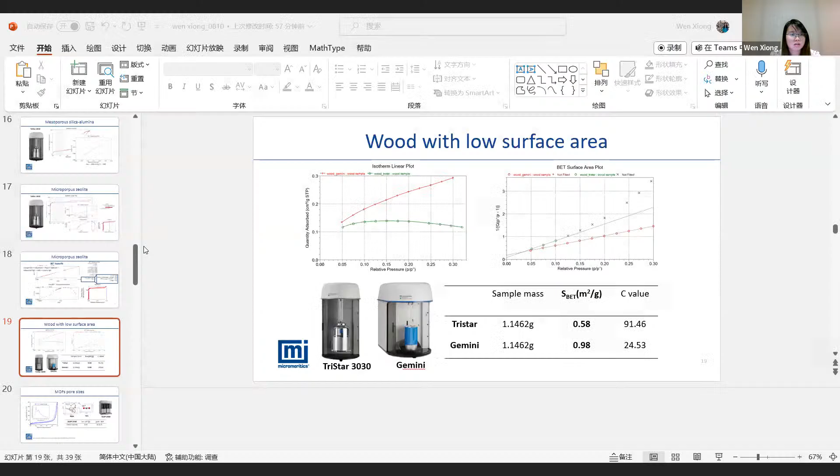Okay, thank you. Good morning, everyone. I'm Wen Xiong from Micromeritics Instrument Company. I work as an application scientist in Micromeritics. Today, my topic is going to talk about gas adsorption characterization in the net zero area.

First, please allow me to briefly introduce Micromeritics. We have 3 different production sites, listed here. The one located in Norcross, in the United States, focuses on adsorption analyzers like the ASAP 2020, which people are very familiar with, and the 3Flex. We also have the ASAP 2460 and the Tristar, and so on.

We also have the AutoChem, which is our chemisorption analyzer. The most popular one is AutoChem 2920, and we have been updating the 2920 to 2930. We also have the AutoPore, which is our mercury porosimetry analyzer. And we have instruments we call AccuPyc or GeoPyc, for density testing, like true density or packing density.

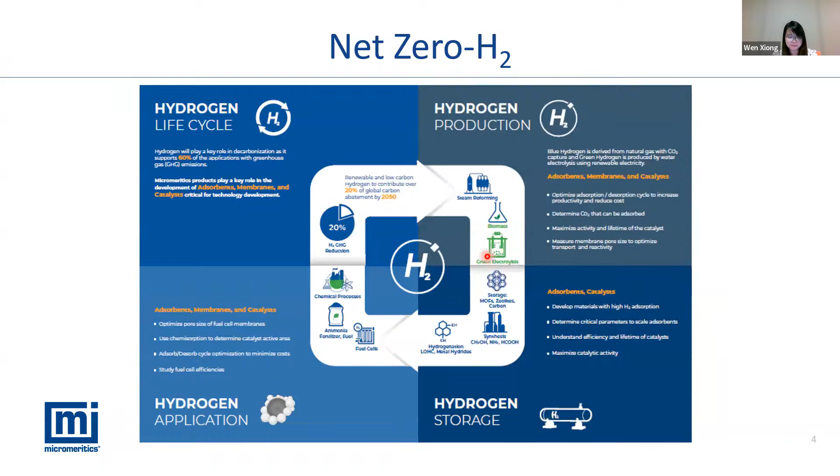So why are we talking about gas adsorption here, because we are focusing on net zero? From the previous two slides, we have seen all the processes like carbon neutral or clean hydrogen energy. All of these processes refer to adsorbents, membranes, and catalysts, three different kinds of materials. Most adsorbents or catalysts, as we know, are porous materials.

So this comes to our topic: characterization of porous materials, like the texture or the activity of those materials, is a very important topic when we consider carbon neutral or hydrogen research in net zero. We have to pay attention to the characterization of those porous materials. Generally, all the research uses gas adsorption to characterize porous materials, to check those materials' surface area, pore size, or pore structure, and we also need to see the porosity of those materials.

If we are talking about the catalyst, we really want to see the reaction activity of the catalyst. That's the things our micromeritics do best.

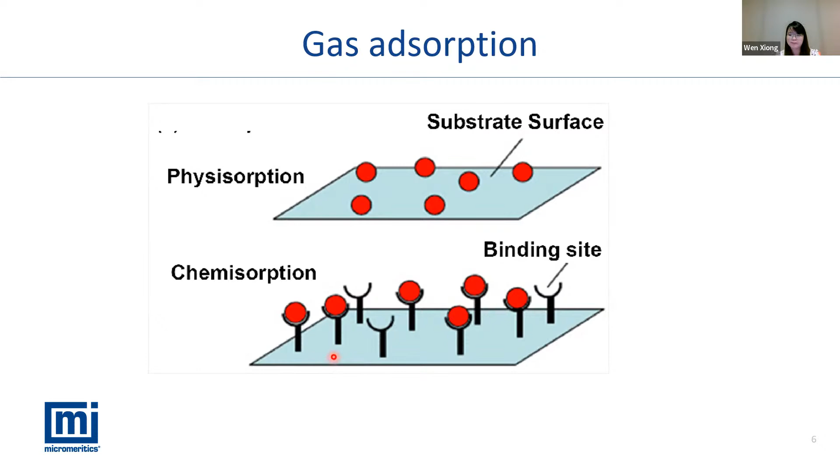Here we are comparing physisorption and chemisorption. I guess people are very familiar with it, so I'm going to introduce it briefly. When we're talking about physisorption, as I just mentioned, it's bound by van der Waals force, which is very weak bonding. So the adsorption energy is low, normally around 20 to 40 kilojoules per mole.

In physisorption, we have non-selective adsorption, meaning it's not location-specific, because adsorption can occur on the surface uniformly. We assume it's uniform everywhere on the surface. That's why I say there's no selectivity - physisorption can occur on the surface everywhere.

Since there's a weak interaction between the gas molecule and the surface, physisorption always happens at low temperature. On the other side, chemisorption always happens at high temperature. When we say low temperature, we're normally talking about liquid nitrogen temperature, which is 77 K. At high temperature, we're normally talking about room temperature, or even 50 to 100 degrees C. In some cases, we may need to go a little higher, like 150 to 200 degrees C. So that's one of the differences between physisorption and chemisorption.

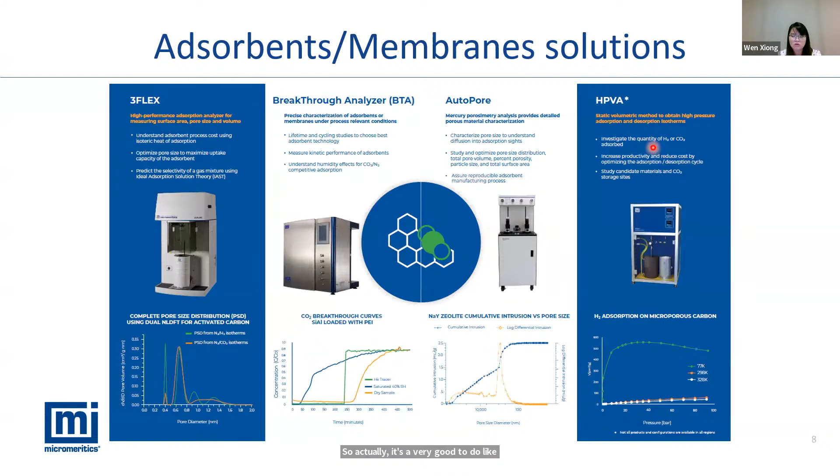The HPVA is testing the sample under high pressure, which can go up to 100 bar or even 200 bar. Since we are talking about hydrogen storage and CO2 storage very often right now, HPVA is a very good tool to do hydrogen storage and CO2 storage testing at very high temperature and very high pressure.

For all the physical adsorption measurement in Micromeritics, we are using the static volumetric method, as I just mentioned in the HPVA and the 3Flex working principle. The static method is measuring the adsorption pressure change during the adsorption process. Then we use the mass balance equation and the gas equation of state. With the measured pressure, we do the calculation and get the gas adsorption amount, the pore size or pore structure parameters, and using different models we also get the pore volume, pore size, and surface area numbers.

The left figure shows a schematic of the volumetric adsorption setup, which is a very easy setup. Normally it consists of three different valves: one to the adsorptive, another to the vacuum, and the third one to the sample tube.

Depending on different instrument models, we have different ranges of pressure transducers to measure different adsorption limitations. With the pressure transducer, we are able to measure the pressure change during adsorption - that's the core center of all the testing.

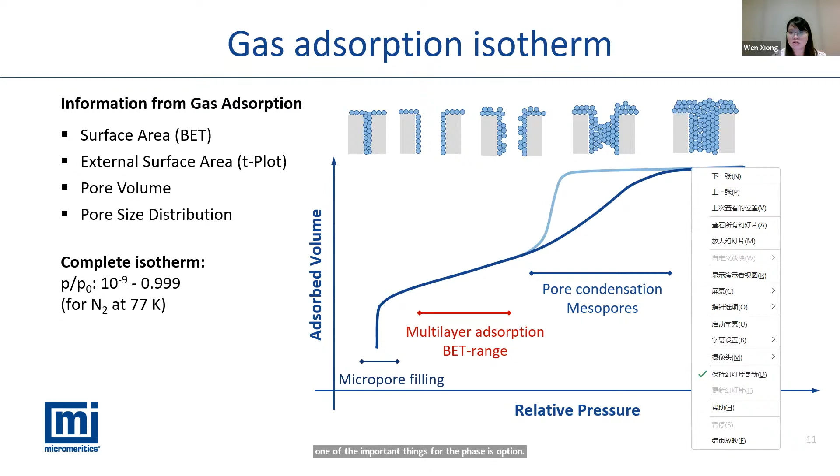Firstly, let's talk about one of the important things for physical adsorption - BET surface area.

This is one of the models we use to calculate the surface area of materials after we get the gas adsorption isotherm.

But later on, the BET researchers - three of them - found that Langmuir's assumption of one monolayer was not suitable for most cases. So they developed their own idea, giving a new assumption.

They talked about five different kinds of adsorption. The biggest difference from the Langmuir model is multi-layer adsorption versus monolayer adsorption. They also assumed the interaction between adsorption molecules can be neglected, and what they consider important is the interaction between the adsorption molecule and the surface.

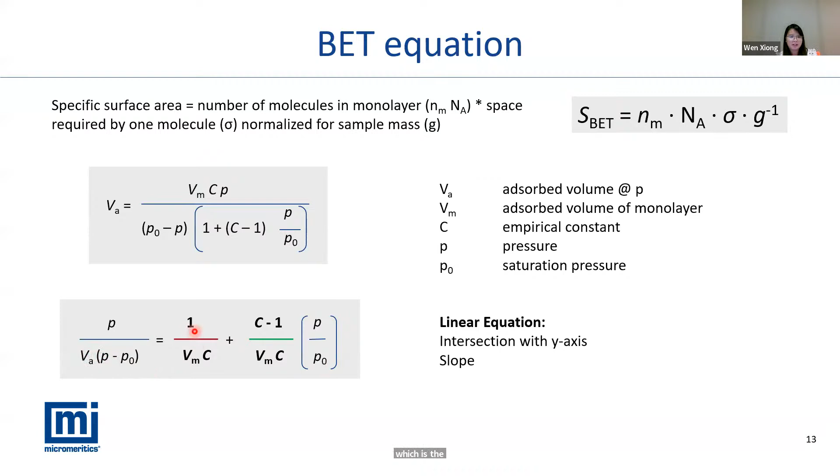The monolayer capacity and the C constant can be calculated from this equation, which comes from the y-axis intercept and the slope of the fitting data in this linear transformation form. This graph is the corresponding data we call the BET transform plot.

It is important to note that the linearity does not apply to the whole range. For example, when the relative pressure is lower than 0.05, it doesn't fit the linear form. For non-porous, mesoporous, or macroporous materials, this range is typically between relative pressure 0.05 to 0.3, which is a very typical BET range.

The C constant accounts for the adsorption enthalpy of the first layer and the enthalpy of condensation. By this definition, we have to get a C constant larger than 0 in our BET plot. That means if the C constant is smaller than 0, your BET plot doesn't make sense. It's invalid data. The stronger the interaction between the gas molecule and the adsorption surface, the higher the C value we get.

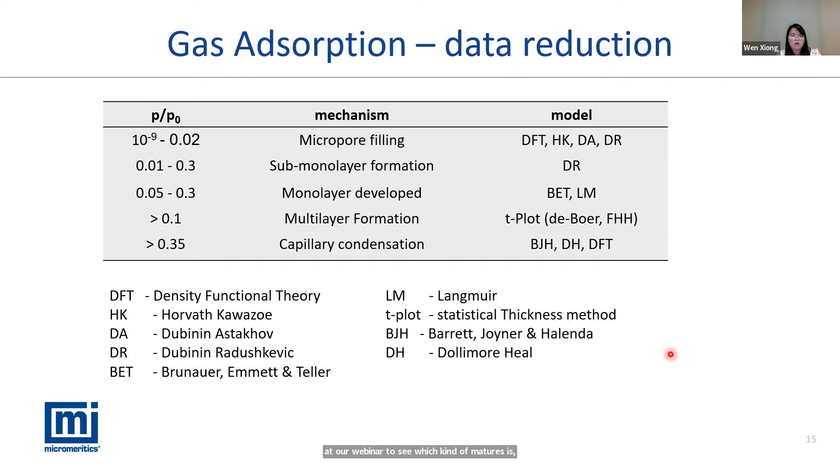Our Micromeritics software has as many as 52 models available for applying. You are very welcome to visit our website or look at our webinar to see which kinds of materials are suitable for which kinds of models to get the reasonable data you want.

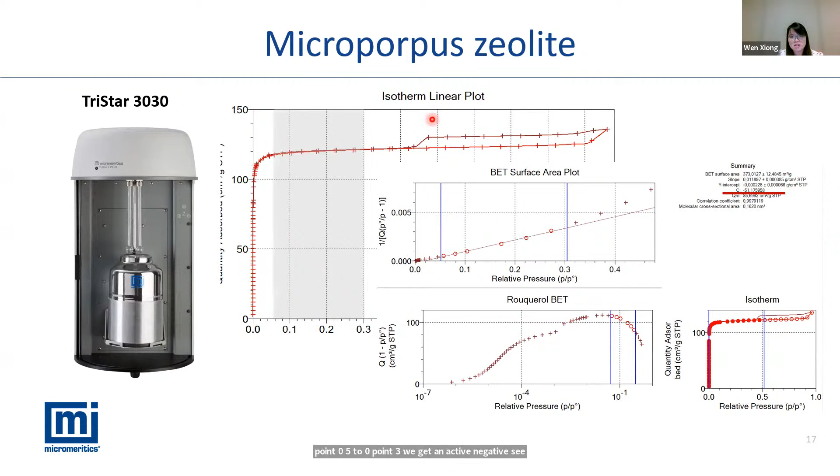We tried to extend the range to a lower relative pressure, and our software can offer outlier BET fitting. This is for Micromeritics software, the BET outfitting script. This script automatically does the BET calculation and checks all 4 criteria for using the BET equation. In this case, when we use the traditional relative pressure from 0.05 to 0.3, we get a negative C constant, so this data reduction is incorrect.

Then we jump to using the BET outfitting script. This is the process of how to use the script to do the data reduction. And we're able to see here we get a C constant value larger than 0, which makes sense for us. We also checked the other 3 different criteria for using the BET equation here. So using our BET outfitting script, we're able to apply the BET equation for microporous materials.

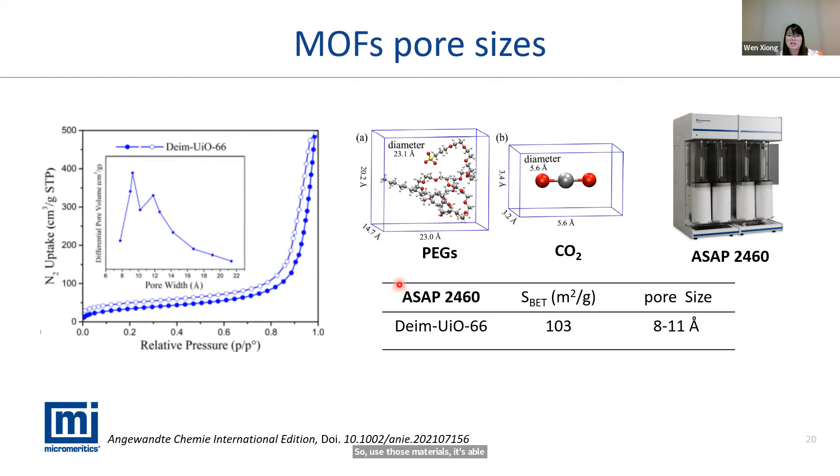CO2 can very easily go into the pore channel even at high temperature, compared to liquid nitrogen temperature. So here I'm happy to show an example of using our 3Flex to check micropores, especially very narrow small pore structures, for the adsorption mechanism.

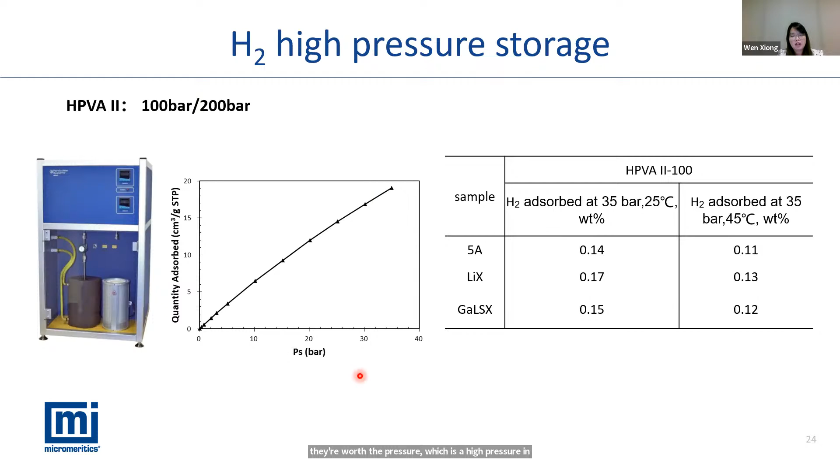That's the results showing on the right. The middle figure is the isotherm of the adsorption, quantity adsorbed versus pressure, which is high pressure in this case. So now I'm done talking about the adsorbent and membrane solution.

In the second part, I want to talk about some details about the catalyst solution. As I mentioned before, we normally use physical gas adsorption to check the texture property of the catalyst support. This is the first stage characterization of the catalyst.

The second stage of the catalyst characterization tries to characterize the catalyst itself, like the supporting metal catalyst, some metal oxide surfaces, some zeolites, some MOFs - those kinds of catalysts - using catalyst chemisorption characterization to do the catalyst activity or selectivity evaluation.

I also list 4 different kinds of instruments here. We are going to talk about the ICCS and FR later on in detail, so we'll skip this one. AutoChem, I'm going to talk about this in detail since this is our newly updated AutoChem. The 3Flex chemisorption - if we recall, I was talking about 3Flex also in our adsorbent or membrane solution. When we're talking about physisorption, our 3Flex can be a very good instrument for micropores all the way to macropores.

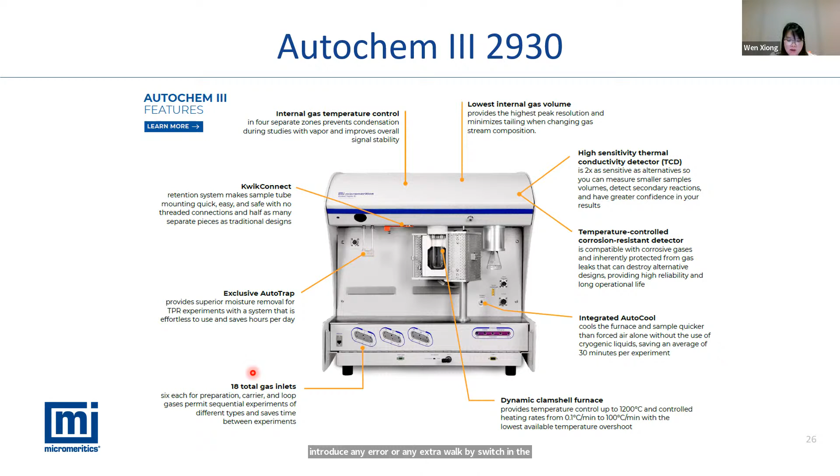Now let's go see the KwikConnect which I mentioned. I really like this design. This is our patented new KwikConnect sample loading. The new design puts these 2 separate pieces together, and instead of using a nut for sealing, we use snapping for the sealing. With this design, we are able to make sample tube installation very fast, maybe 1-2 seconds, very easy and more reliable than our traditional design, because we are using one piece instead of 2 separate pieces. We can also reduce the risk of breaking the sample tube.

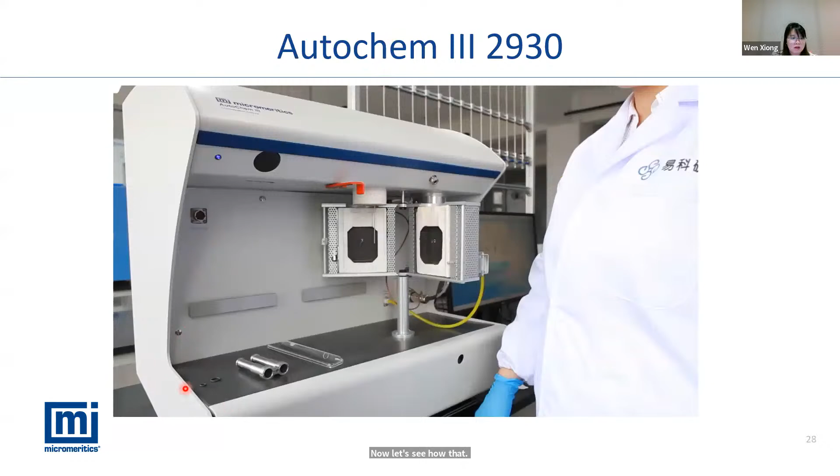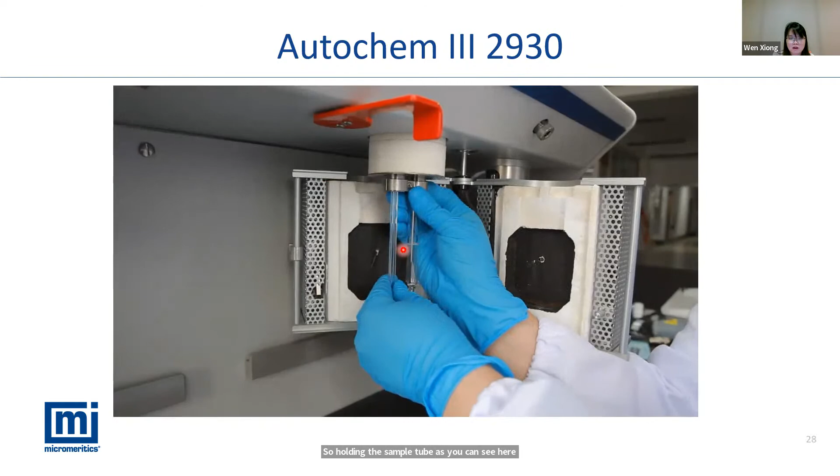As you can see from the picture, and you'll see in the later video, we just need 1 hand to hold the sample tube. In the previous design, we had to use 2 hands to hold the sample tube, which has a high risk of breaking the tube. Now let's see how the snap lock works. As you can see, we just need one hand to hold the sample tube, and then with a click, we snap the sample in. The whole loading process is easy and faster.

Here is our new vapor source generation mantle. It's much easier to operate, as you can see from the video.

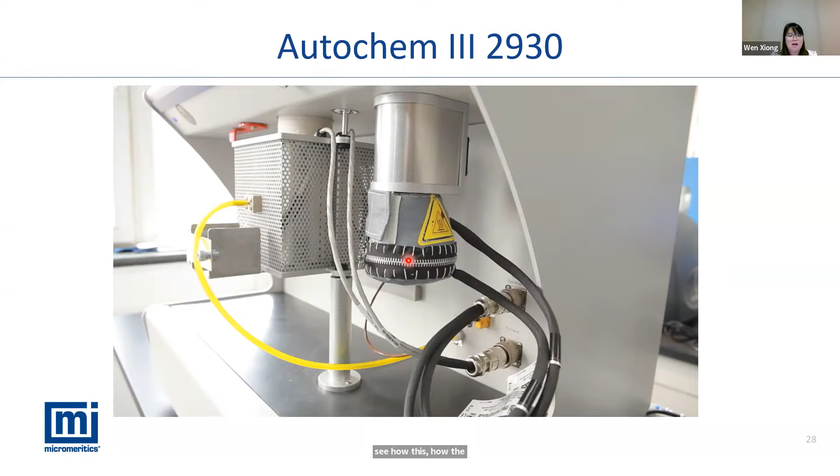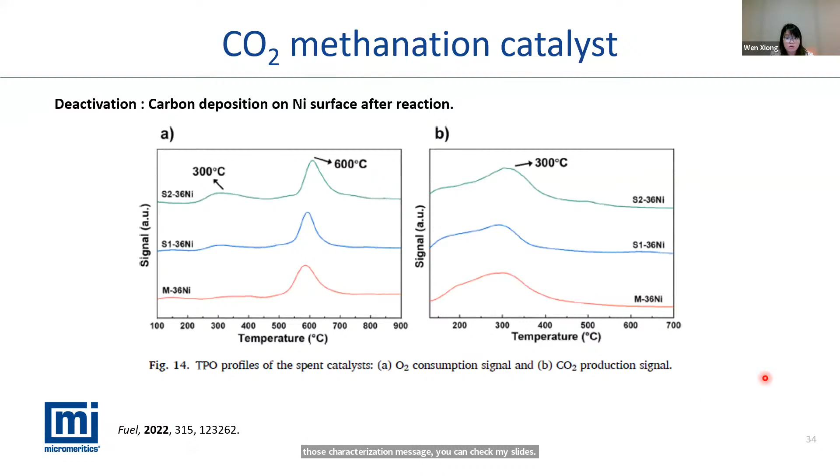Finally, I would like to introduce in-situ gas adsorption characterization for catalysts. This is a new promising method from Micromeritics, in-situ gas adsorption. Here I'm using the methane dry reforming reaction on the nickel catalyst as an example.

As we always know, methane dry reforming is always operated at very high temperature, like 500 to 650 degrees C. At this high temperature, we cause nickel deactivation either by carbon deposition or sintering. If we want to check the deactivation of the nickel catalyst, we are able to see all the results and the reasons in one experiment by using the in-situ gas adsorption system. This system helps us more easily and quickly check the deactivation mechanism.

So how does the in-situ gas adsorption work? Let's look at the two instruments. We combine our Micromeritics ICCS, which is one instrument, with the FR system, which is the other. If we combine these two systems together, we are able to do the in-situ gas adsorption, in-situ studying the change of the nickel catalyst during the methane dry reforming process.

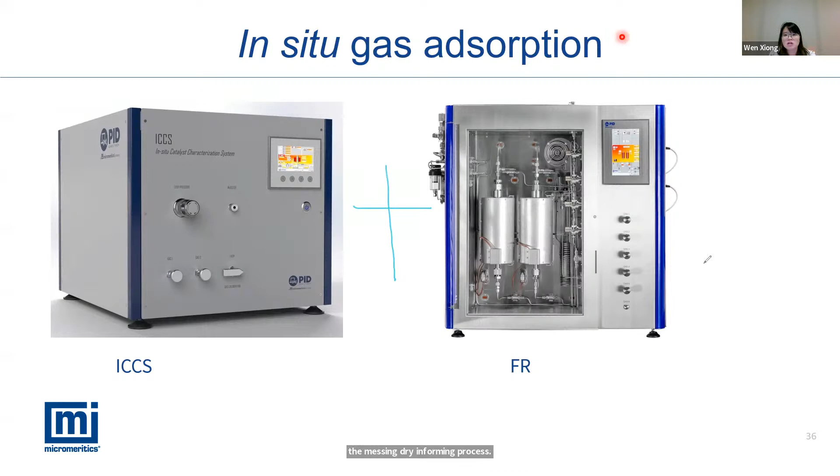First, we load the nickel catalyst into the FR sample tube, as shown here. Then we flow either CO or hydrogen, whichever gas you need, from the ICCS system all the way to the sample tube to conduct pulse chemisorption on the nickel catalyst, calculating the dispersion before the reaction.

Third, we flow CO2 and methane to the catalyst, recording the production from the sample tube as a function of time, or as a function of temperature, or as a function of pressure—whatever you want to check regarding the dry reforming performance of the nickel catalyst.

We can go to the separator to separate the products, like water or methane from the reaction, or other products, whatever you want. Then we do the online recording by either MS or GC to record the reaction product.

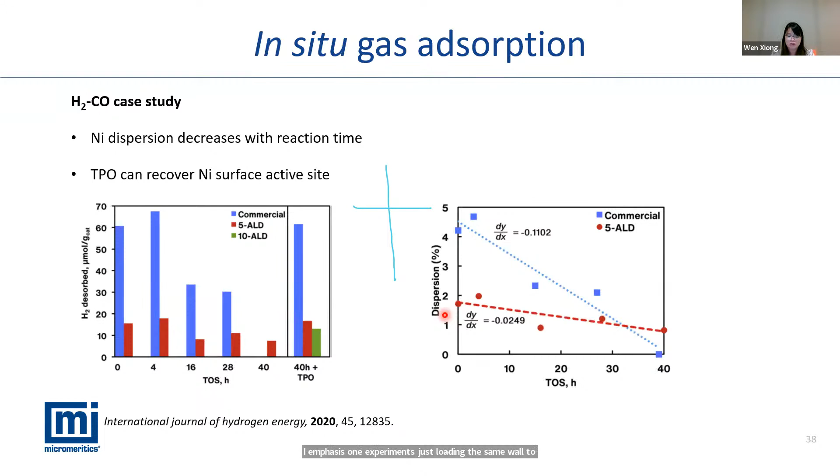This is all I have today. Thank you for your attention and thank you for your time. I guess my question slot will be later, right?

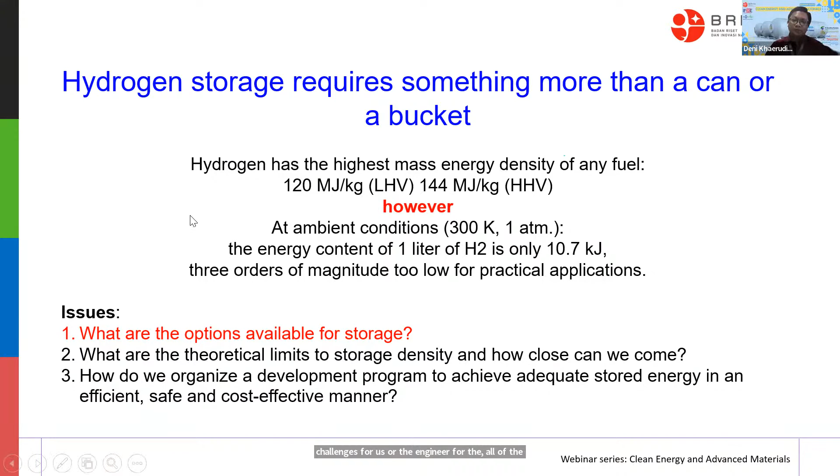This is just to remind you again of the comparison of hydrogen storage methods. So we are focusing on how hydrogen is stored, what kind of method, like compressed gas - this is the physical one - or the liquid state, which is in the cryogenic condition at minus 253 degrees Celsius. This physical option, we will talk about more.

This is about absorption, physical absorption by porous material. There are many porous materials, but here I will focus more on carbon. Dr. Xiong also mentioned that physical absorption can be reversible, a little different from the chemical one. And then there's metal hydride, which I will highlight a bit.

There are some advantages and disadvantages to all these methods - the complex hydride and chemical hydride also. There are actually many options, and in the next slide I will show you more of the main options for hydrogen storage.

So what are the important characteristics for the hydrogen storage media or sorbent material? If I concluded, there are 7 points, like high hydrogen content per unit mass and unit volume. This is what we need to concern ourselves with.

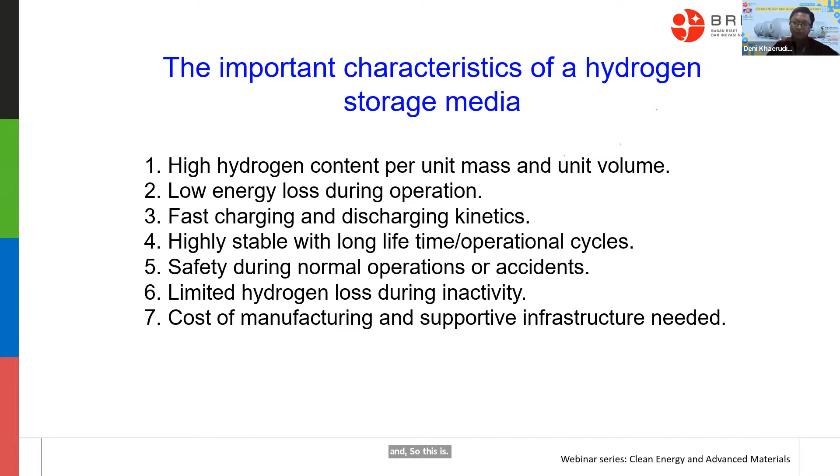And the cost of manufacturing and supportive infrastructure, indeed yes. So these are the 7 characteristics that we need to consider when we want to develop the storage media for hydrogen.

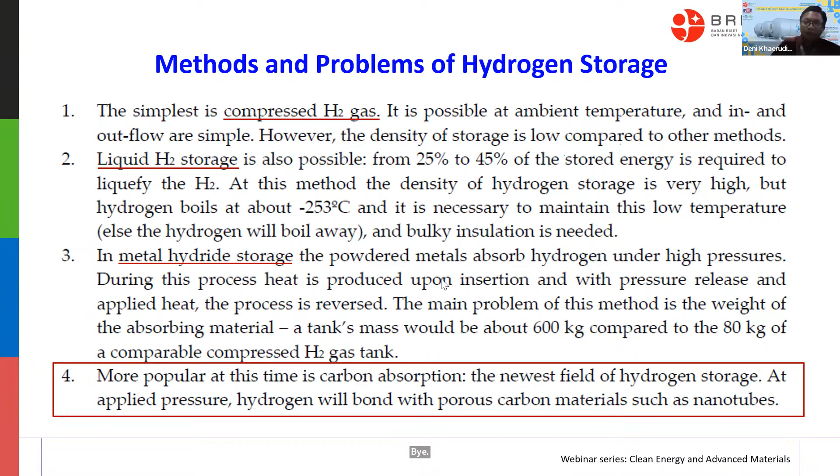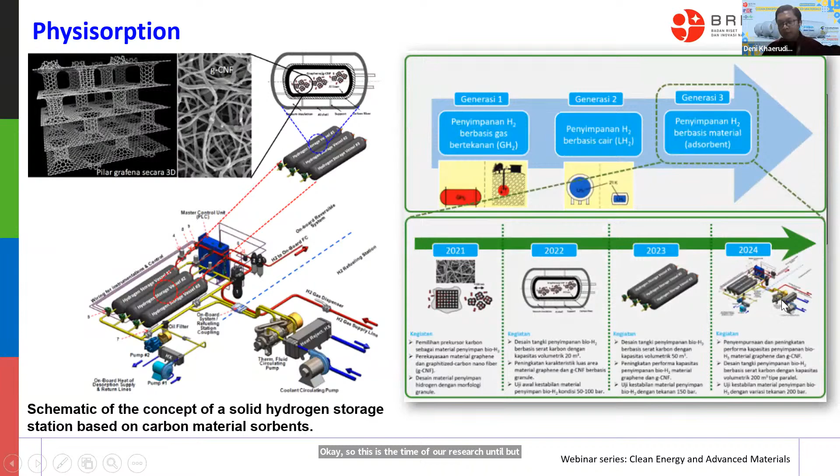Okay, so this is the timeline of our research, but maybe not into the system yet for currently, just maybe until the storage I think. Okay, we just want to highlight again what kind of hydrogen storage is possible, the most possible ones.

On the top part, in the upper part, this is the physical base. This is already well established, like compressed gas, cold compressed, and liquid hydrogen that I already mentioned before. On the bottom part, the material base, which is our concern, still has many possibilities for research to advance and make it more efficient in order to make it as viable as the physical base one.

For the material base, there are two types: chemical sorption and physical sorption. We are focusing here on physical sorption, which is focusing on carbon materials. Actually, for physical sorption itself, there are many besides carbon, like zeolite. Here in Indonesia we have zeolite mineral, many. Carbon for sure, we can also use directly graphite mineral or even from biomass. Metal organic framework, there are so many advancing in recent journals, using these more both for supercapacitor, for battery, or many other applications, and many other techniques also that we can use for storing hydrogen.

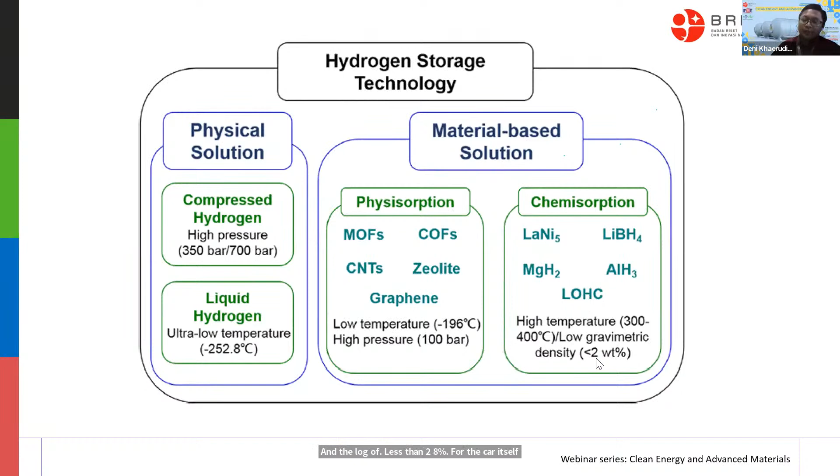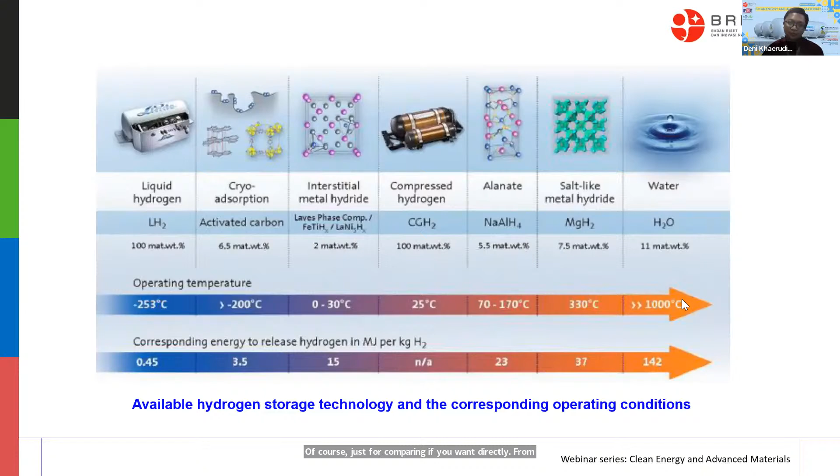Yeah, this is the conditioning of each storage technology, like in the liquid - the operating temperature is minus 253 again, and this is comparing the corresponding energy to release hydrogen in megajoules per kilogram hydrogen. You can see here the compressed one, and also the alanate metal hydride. And the water itself, of course, just for comparing - if you want directly from water, you need about more than 1000 degrees C. Okay, so for sure this is not feasible for industry.

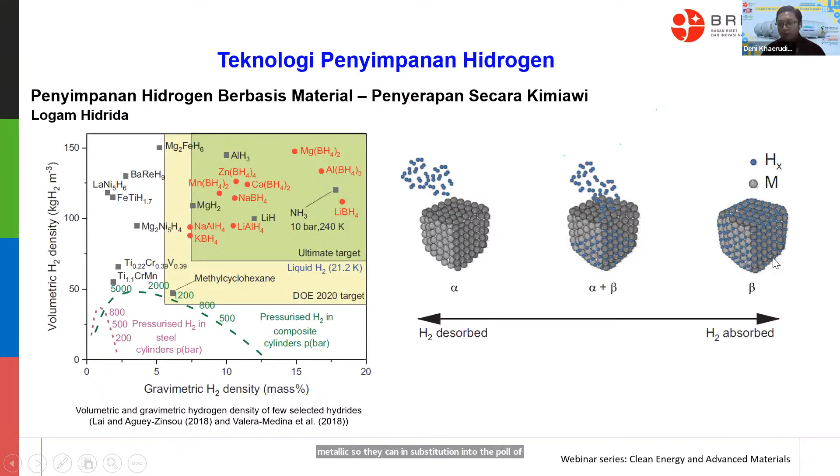So H is meaning the hydrogen, and M is the metallic. They can interstition into the pore of the metallic ether. So this is the condition of the absorb, but this one is the desorbed.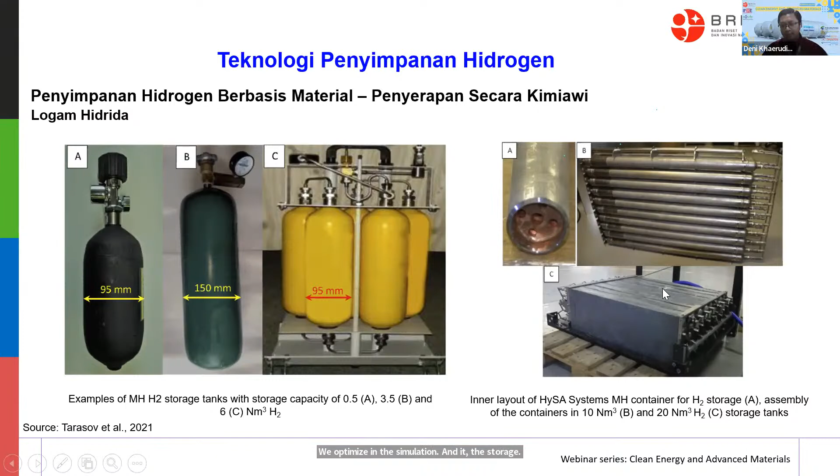So this is the conditioning when we want to do the experimental condition after we optimize in the simulation. And if it's the storage tank itself, there are many ways, the container itself. So this is the conditioning of the metal hydride in the experimental condition in the facilities lab here in SAIAMC.

So how much laboratory preparation that we need for the metallic. Actually this is also similar to the solid storage one. The conditioning here uses 30 to 80 bar, high pressure up to 200 bar, and then the lower pressure is less than 20 bar, and there are many other facilities that we need to consider.

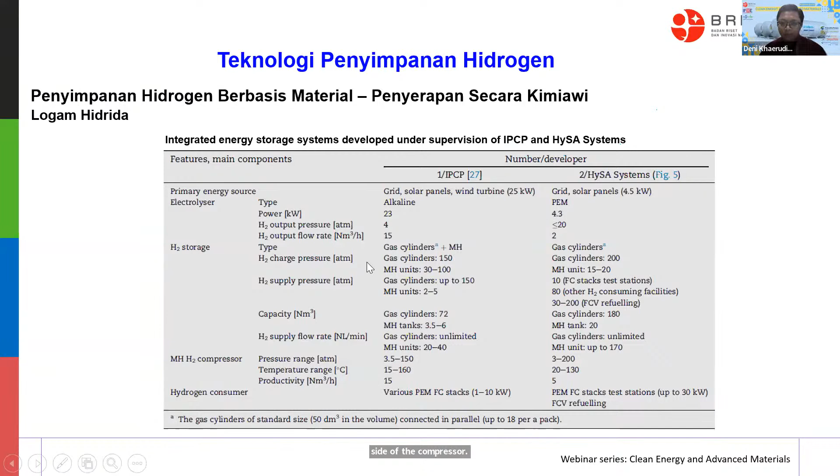Okay, so this is the integrated system like this one. The information is from here, the report, like what kind of compressor, the consumer, and many others like the gas cylinder etc. Maybe I will not go into details here.

Okay, so this is the concept of the physisorption itself, like this is the adsorbent. For instance, we have graphene or graphene oxide, or even CNT or active carbon, activated carbon, and also the absorptive element itself is like hydrogen, or maybe if we want to talk about CO2, it also can depend on what we are focusing on.

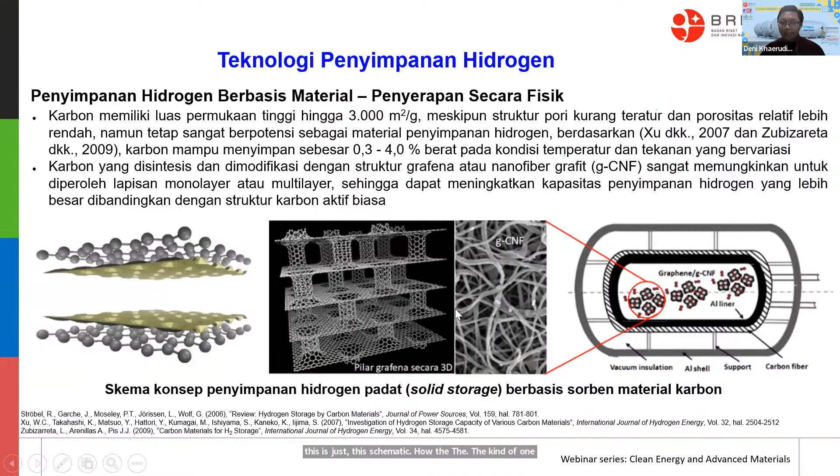Okay, so this condition is possible for reversible absorption desorption because this is only a very weak force only on the surface, not like bonding like in the chemical state. So this is just the schematic of how graphene or the carbonaceous base like carbon nanofiber acts as the storing media of hydrogen when put in the tank. And yeah, there are many options for the carbon base, like using activated material.

Even there are also some options like activated charcoal here, but I'm not sure, I haven't yet elaborated further in detail about this research on the charcoal. The one that I already studied is about using CA, activated carbon, CNT or nanotube. There are also many others. Meanwhile, for the hydride, there are many alloys, intermetallics, non-crystalline complexes, and many others also.

Okay, so if you are curious about the morphology of the carbon itself, on the top part is the CNT, carbon nanotube. The lower part is the graphene, from the graphene.

So this is the condition of storing hydrogen in the solid state condition. Like the hydrogen molecules are attracted to the carbon material on the material surface through van der Waals interaction. This is a very weak force leading to adsorption. And then the desorption, on the other hand, likely occurs when conditions such as temperature or pressure are changed, meaning we increase the temperature or pressure, and then it will release, causing the hydrogen molecule to detach from the carbon material surface. So this is the basic condition, adsorption, desorption on the carbon surface.

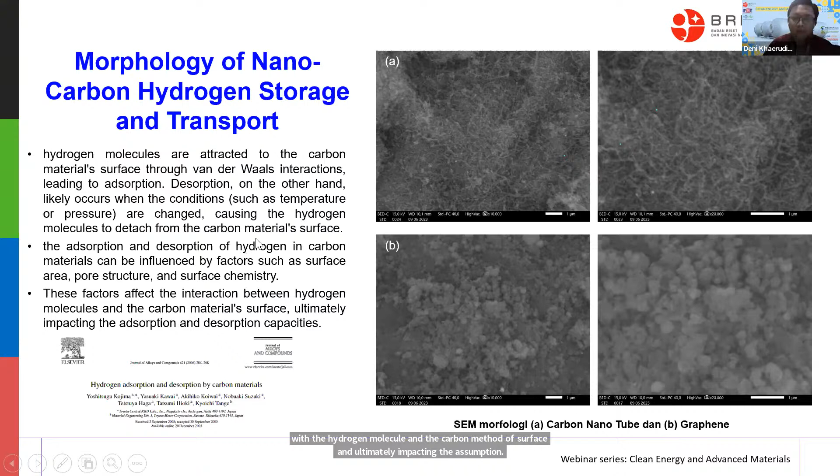Can be influenced by factors such as surface area, pore structure, and surface chemistry itself. Meaning, we can also load it with some catalysts like nickel, platinum, or others, but only in small percentage. This factor affects the interaction between hydrogen molecules and the carbon material surface, ultimately impacting the adsorption-desorption capacity. So this is the basic condition when you are interested in doing hydrogen storage based on carbon material.

Therefore, we need another testing, the one that Dr. Xiong already showed. But unfortunately, in our institute, we still don't have those facilities. Maybe later I will ask you, Dr. Xiong.

So this is our hypothesis. We have two hypotheses here. Hypothesis one: nanopores enhance the hydrogen absorption capacity. Hypothesis two: acid treatment to increase the active surface is expected to increase the absorption capacity of MWCNTs, and open cap and surface functionalization of MWCNTs is to increase absorption capacity.

I think this is just the carbon one, right? So we need to enhance the surface area or the pore size, the pore distribution, I mean the pore distribution with a certain pore size diameter.

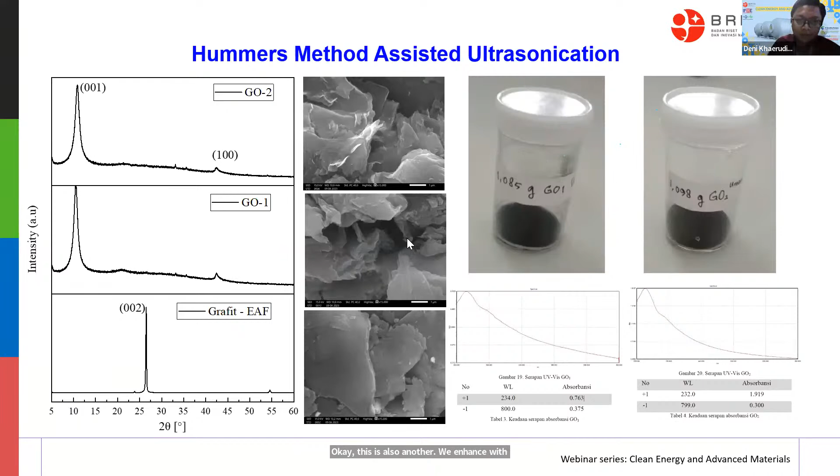This is also another result of ours regarding enhancement with ultrasonication. Maybe I'll just skip it. This one I took from another research actually.

So some pores with high surface area, about more than 2,000, even more than 1,500 is already very high surface area. They successfully achieved almost 3,000 meter square per gram. This is very high. Therefore, the hydrogen capacity of their research is very successful.

We can see from this table, this is the pore size that they achieved from all of the sample types they have. This is the surface area, BET based, that they obtained. Almost all of this material is higher than 2,400.

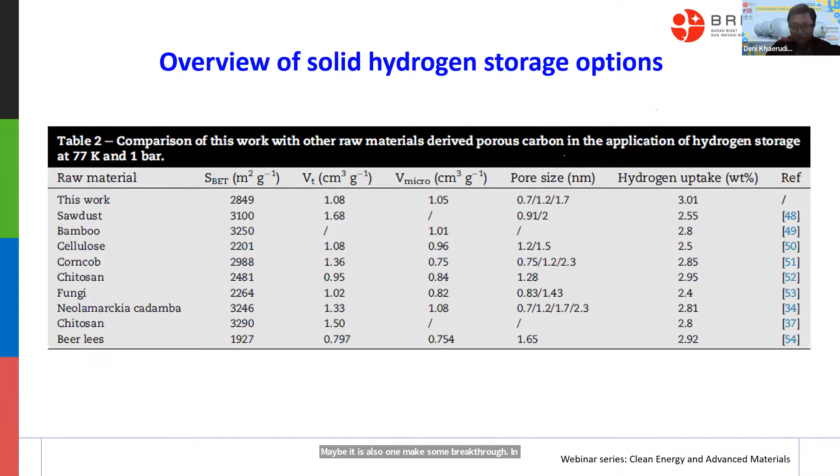This highlights the targeting of the DOE goal for hydrogen storage, the gravimetric capacity, material-based, the achievement target for 2025 is about 1.8 kilowatt hour per kg for the material base. This is the ultimate target, and the volumetric capacity - for the volumetric capacity, if possible, about 1.7, but this unit is in kilowatt hour per liter, whereas before it was mole per gram or other different units. All of this is the ultimate target from the Department of Energy for the storage goal of hydrogen based on the solid state.

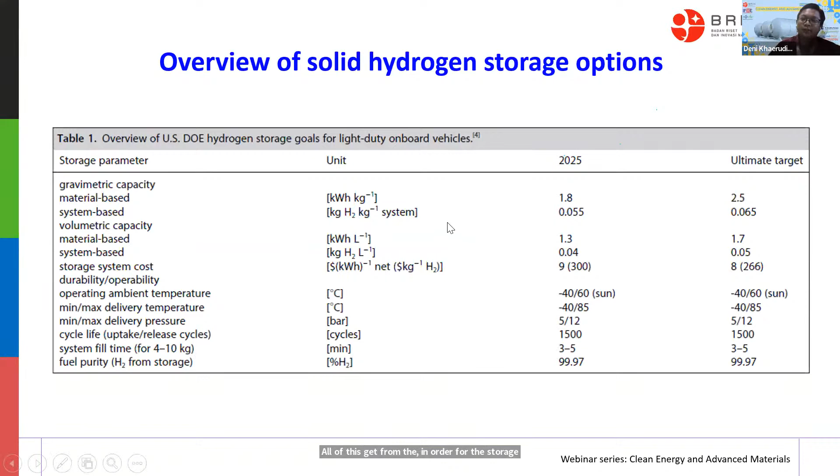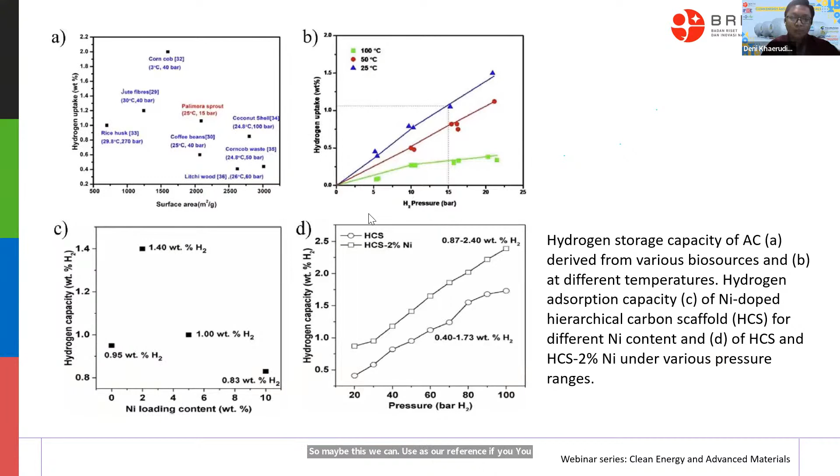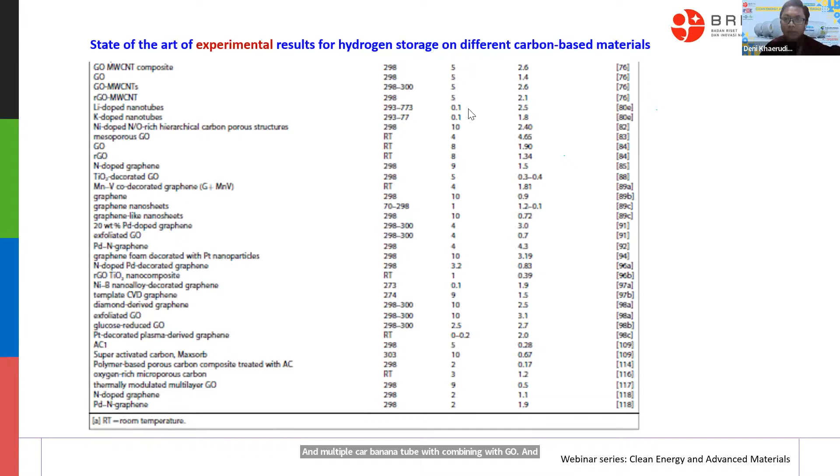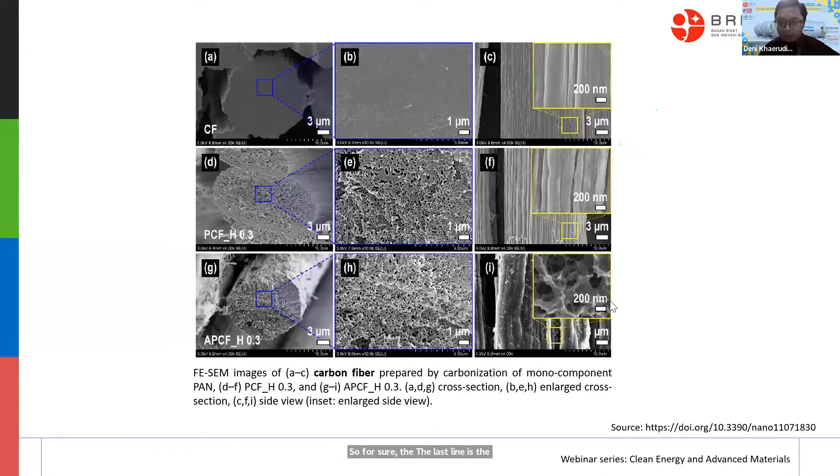Okay, I just highlighted again. So this is the carbon fiber. If you want to know the morphology, the ABC has no treatment, the DEF has some treatment, and GHI has a further treatment. The pore size and pore distribution are different between the second and third lines, and also between the original virgin one and the last line. For sure, the last line is the ideal one as the sorbent material for hydrogen, and indeed this is not easy to achieve.

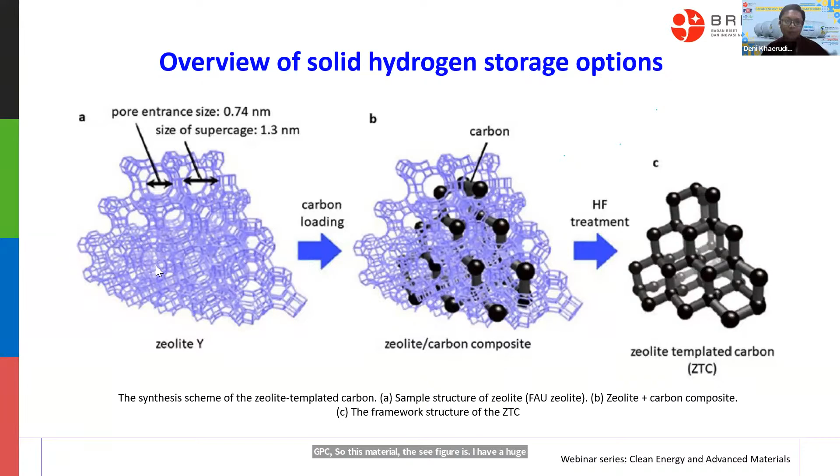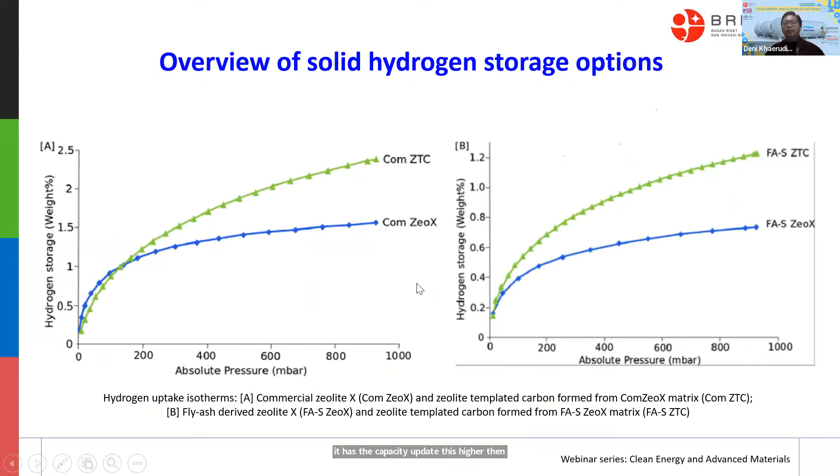This is maybe the expertise of Dr. Xiong, I think. Maybe there are some apparatus you've mentioned similar to the function of the Sieverts apparatus. Honestly, we don't yet have this apparatus. We plan to study hydrogen storage using this one. Maybe at first we want to develop a prototype, but if you have something like microbalance equipment, I'm very interested.

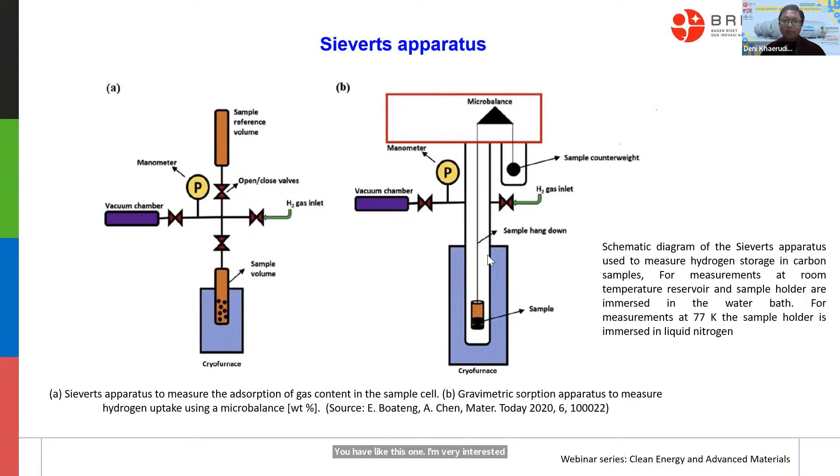Maybe Dr. Xiong can explain further. So actually the basic concept of conditioning is the transport thermodynamics that can operate at low pressure or low temperature conditioning. The blue one is nitrogen, liquid nitrogen I think, for the low temperature conditioning. Many research studies show temperatures like 77 Kelvin, 78 Kelvin, similar. And also this one for the dissolved condition. So this is just the concept of adsorption desorption based on the Sieverts analysis.

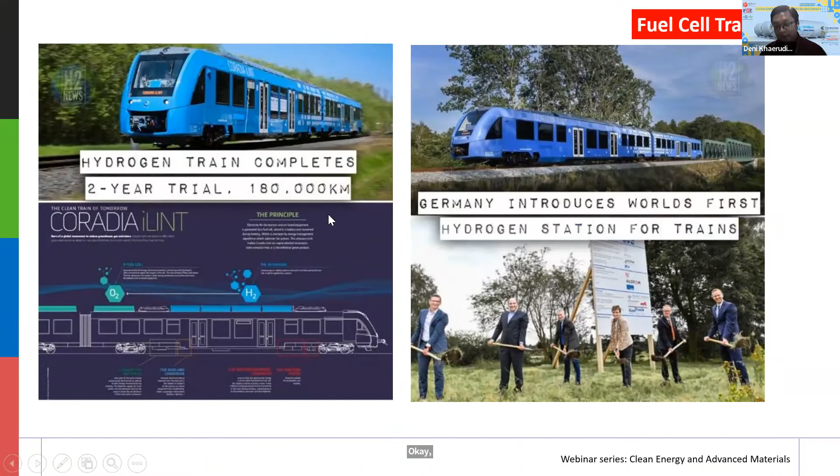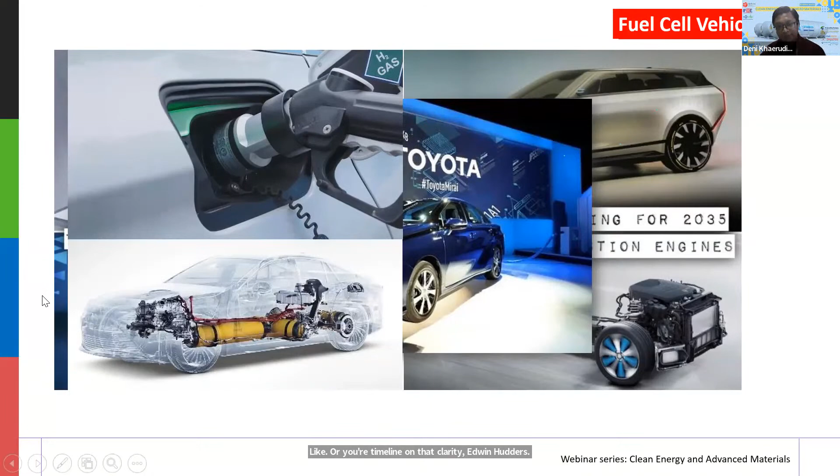I just want to highlight again, this is some application of hydrogen already in our real life - for train, for aviation it will be by 2035. For cars already, like hydrogen BMW, Jaguar, and many others like Toyota Mirai, Honda Clarity, and many others. This is just to show how fast hydrogen is developing, but this is the gas pressure based condition, for mobile applications like this. This is from Linde, and like Tucson, Mirai, Clarity, Nexo. There are many brands developing FCV, fuel cell vehicles.

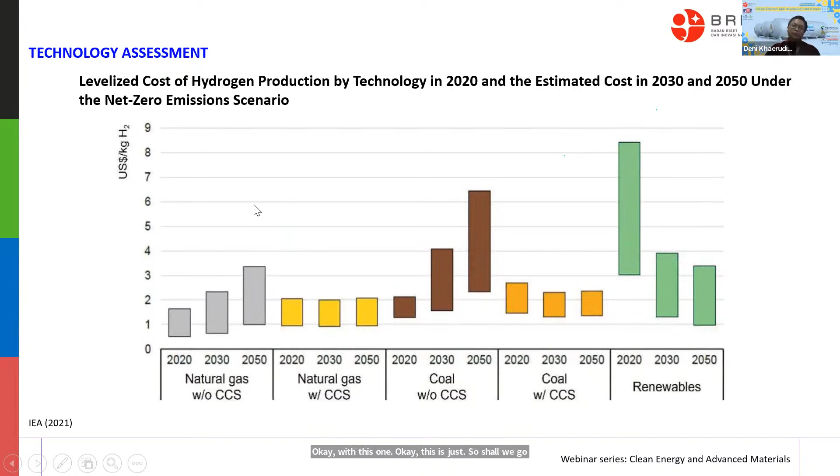This is the LCOH, the levelized cost of hydrogen, like this from natural gas. At 2050 it will increase more in price due to decreasing green or renewable hydrogen, and natural gas. This is without CCS. If this is with CCS, carbon capture storage, coal will increase more in price by 2050 as expected, and then coal with CCS may still be able to compete with this one. This is just to show the future prospect of hydrogen in real industry applications.

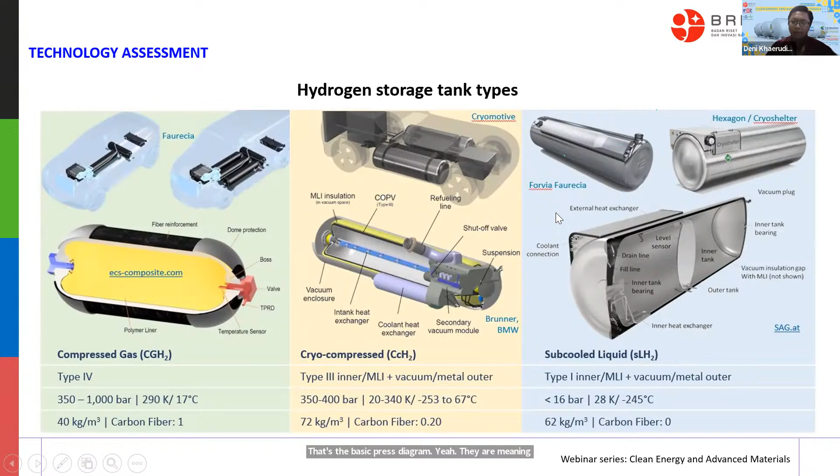This is for the pressurized or storing of hydrogen, both in cryogenic, liquid, and compressed gas form - just the basic phase diagram. There are many options like compressed gas, cryo, and subcooled liquid called cryo. This is just the storage tank, not the sorbent media. The storage tank for compressed, cryo, and liquid - the physical condition that is required.

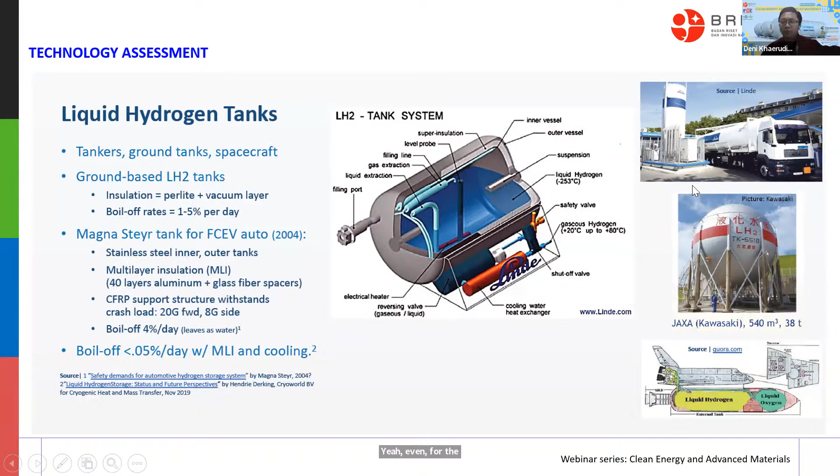And this is for the liquid hydrogen tank. Even for aerospace, like JAXA, they're using this for aerospace, liquid based hydrogen. For aviation, as I mentioned before, this is also actually using the liquid base. Called cryo compress - this is especially for BMW, they're using the cryo compress condition.

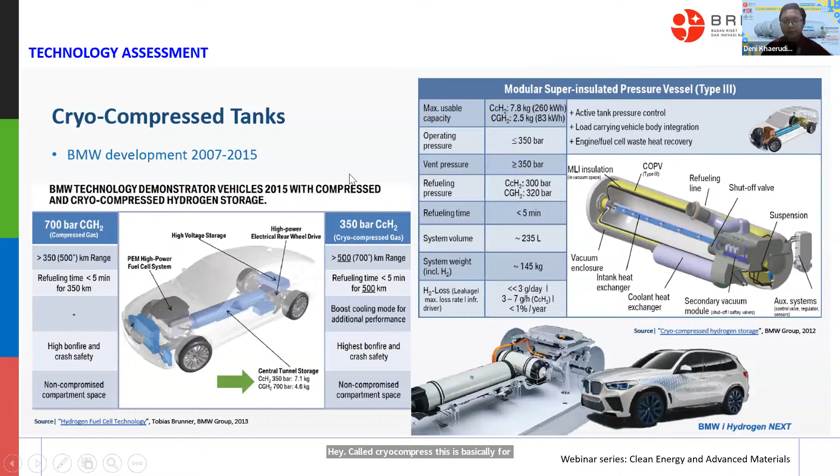This is some of the marks from the industries available for this type of tank. I'll just skip this one. This is the latest storage tank made of carbon fiber, the type 4 tank.

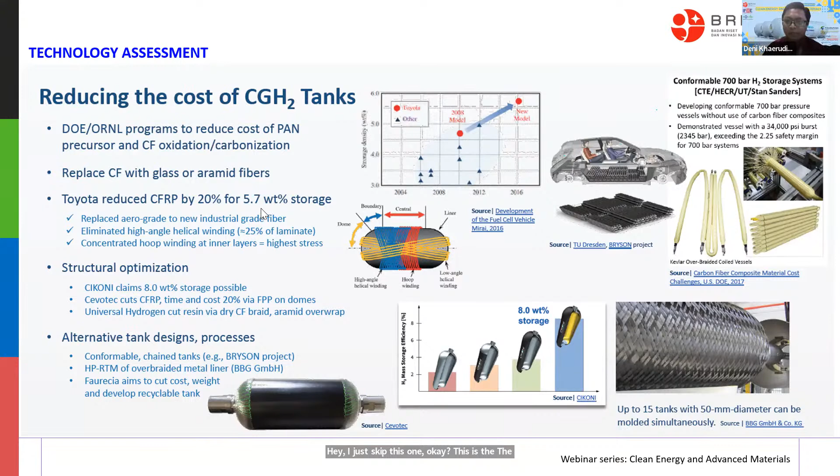So this is the anatomy of the tank itself for hydrogen storage specific purposes. This one is also from Dresden. Just highlighting it, and this is my remark.

There are many ways of storing hydrogen, for instance compression, which can be used to store small quantities of gas. Storing hydrogen in liquid form can be used for storing large quantities of gas for longer time, however at high energy penalties for liquefaction. For porous media, it may offer an advantage for storing small quantities of gas in medium to long term.

Maybe that's all from me. Thank you, back to you Pak Oka.

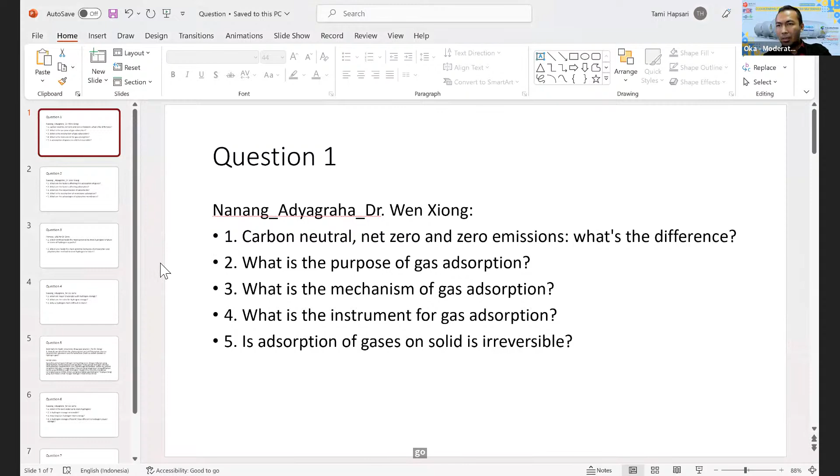This question is from Nanang Adyagraha, who has five questions for you: Carbon neutral, net zero, zero emissions - what are the differences? What is the purpose of gas adsorption? What is the mechanism of gas adsorption? What is the instrument for gas adsorption? Is adsorption of gases on solids reversible or irreversible? I think they are all related, so please go ahead and answer.

For the first question, carbon neutral versus net zero versus zero emission - if you really want to see the difference between those terms, you can Google it for a better definition than I can give. But I'll talk about the difference briefly. For carbon neutral, we are focusing on CO2 - we say we produce this much CO2, we have to deal with that much CO2, meaning we are not going to emit any more CO2 to the air.

For net zero, we're talking about net zero technology. As I mentioned in my presentation, when we talk about net zero, we are mostly talking about CO2 net neutrality and clean hydrogen energy. We can involve others too, but those two are the most representative net zero technologies. Zero emission has a wider range than carbon neutrality - you have to consider other greenhouse gases like methane, SO2, or others. If you're really interested, you can Google and find the exact definitions.

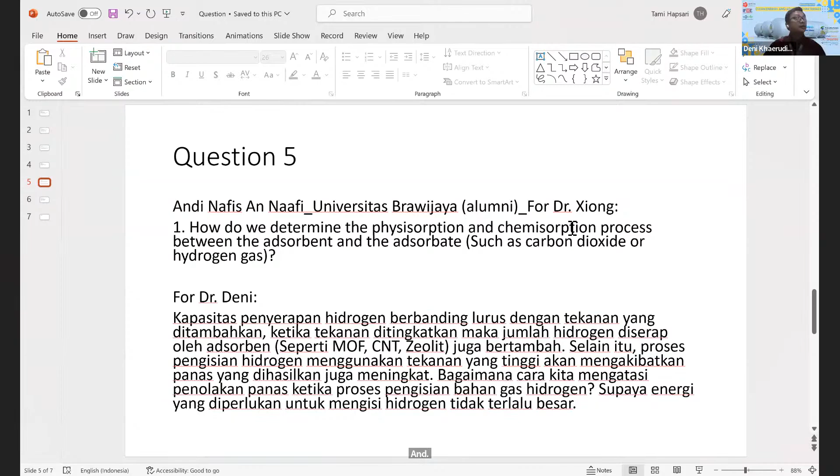I think this is the reason why for the adsorption process, usually in liquid or cooled conditions, it is done in order to make it easier for hydrogen to adsorb. Therefore, it's cooled by liquid nitrogen. This is only an illustration, of course, but in reality you can use many other approaches, for instance using a spiral design, liquid nitrogen, or any other cooling system to make it easier for hydrogen to adsorb.

So yeah, indeed this is like a thermodynamic engine, and there are many ways we can solve that, which we call the HMS - Heat Management System. We need to be concerned about that, otherwise it can also be dangerous. Okay, good question, thank you.

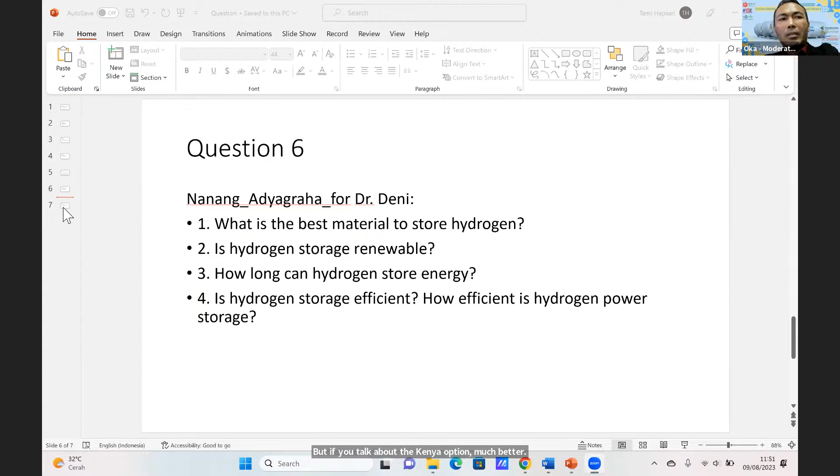All right, this is interesting. You can go ahead. Hello, Mas Nanang, how are you? This is Mas Deni, Prof Jarod's student. Long time no see, Mas Nanang.

Oh, very good question and tough question. Cannot answer exactly because it's a very niche area application. We need to perfectly study on which sector, which application for defense. Even for hydrogen storage, for instance radio communication, that's okay, right? We only need small capacity and the hydrogen we can connect into fuel cell, and that's for radio communication, it can work. Or even for stationary, again for communication, or maybe in some remote area, or just onshore, maybe they also produce hydrogen or whatever. I don't know, there are so many. This is too niche area. I'm not sure, but maybe after this, Prof. Enya can add some information.